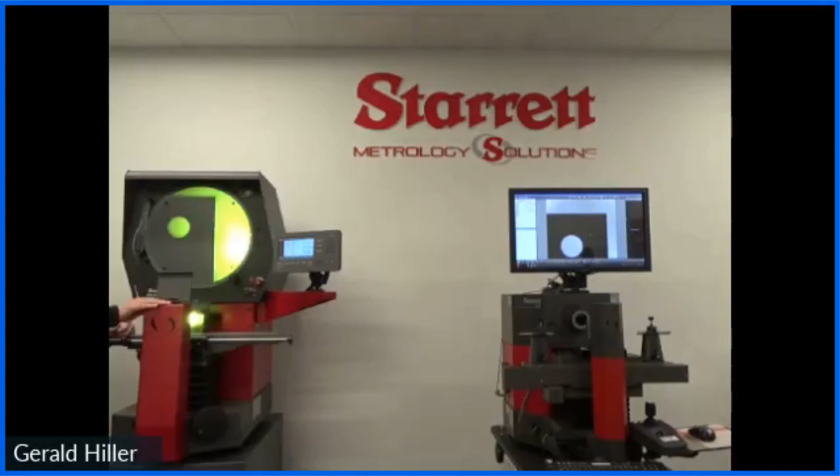On this particular model, we're using LED lighting. Other systems on the market you may find that are halogen. One of the benefits we see with LED is that you're talking tens of thousands of hours of life, whereas a halogen, you're looking at hundreds of hours.

So just to kind of go over the nuts and bolts of it, we basically have a projector going onto our part. The light that gets through is creating an edge on the screen, okay? So in this case, we have a hole, it's actually going through that. Anything on the part that is blind, if you will, you cannot see. So we have our light being projected onto the part.

That light is then going through the lens. That lens then projects it onto mirrors, which are back here. And then that goes onto our screen as a shadow. Some of you may have heard this referred to as a shadow graph.

Now, different comparators are going to have a different number of mirrors. This particular unit has 2. There are some that have 1. The main difference is that with 1 mirror, your image will actually be upside down in addition to being mirrored or backwards. This particular system has 2, so it's been corrected. So it is right side up. It is still backwards or mirrored though. So like I said, that tends to be the most common. And as you can see, we can on the screen see our edges.

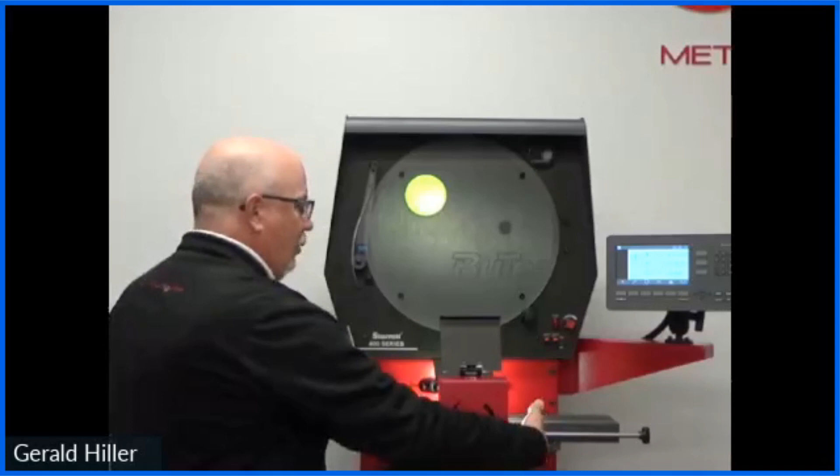So in this case, we're moving our X just by moving the knob. We do have a quick release option, so you can move the stage. Okay. We also have our zoom. Now, if you think about it, this is actually equivalent to our Z. We have a horizontal system here. This is actually our Z, which is our focus. And then even though it's going up and down, this is actually our Y.

Okay. The other thing is that we've got our protractor here. It may be difficult to see on the screen, the crosshairs here, but I'm actually moving this, and you can see my Q axis is moving. Now, these three axes, the X, Y, and Q, have encoders in them, and that counts how many steps, or as you move it, it's recording that distance up to, I believe, about a half a micron accuracy on those.

Excellent. And as far as CNC goes, I'm going to be showing a system on the video side with CNC, so you can see the differences and the benefits of that. Sure. So even though it's a standard system, the accuracies are there in order to be able to follow these blueprints and these tight tolerances, which is awesome.

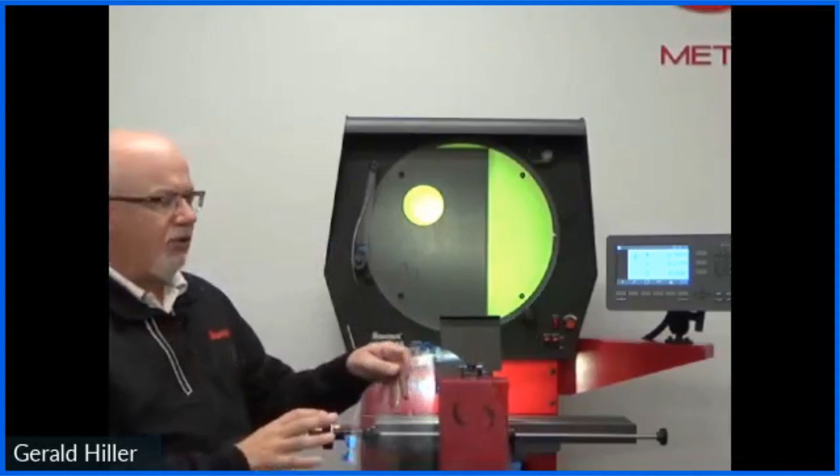So can you go into the most basic way to get a measurement on an optical comparator if somebody just wanted to take a visual check on it? Sure. So comparators have been around for 80 years or so, even more. The typical method for making measurements on this is with what's called an overlay. This is a Mylar overlay, and it may be difficult to actually see this, but there is an etched image on this. And these are all specific to the particular magnification of the lens that you have. In this case, this is a 10x.

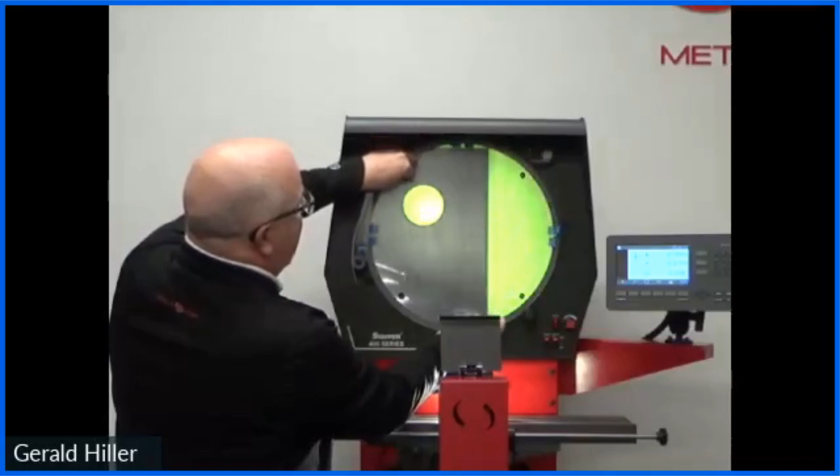It's got a grid on here, and you can put this on the screen. So instead of a horizontal and vertical grid here, you can use radiuses, you can use angles and so forth. But once you lay it on the screen, then you basically come in and adjust your image on the screen, and then you can find whether it falls into that particular overlay. So this is a go, no-go process, very visual.

You tend to find this with parts that maybe have wider tolerances, because there is some subjectivity of the user. Sure. So looking more at a pass-fail thing here, something that you could check really quickly, get in and out, get back to the manufacturing floor, and start making more parts, which is great. That's correct. Yep.

Excellent. So how do you track what the encoders are reading if you wanted to get an exact measurement on the diameter of that circle there? Sure. So, as I mentioned, these three axes have encoders on them, and they are actually tracking that distance. Now this over here, this is called a DRO, digital readout.

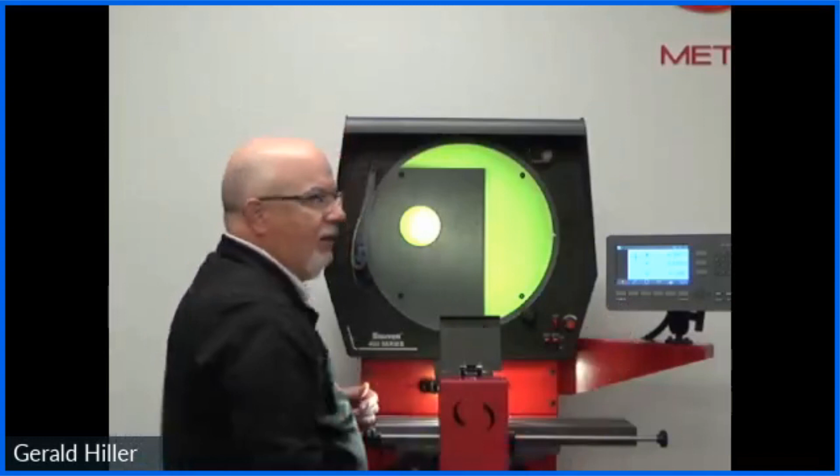We have 4 different options on this. The one I'm showing you today is called the MX200. It's made by a company called MetLogix. In addition to tracking positional accuracy, you can do geometric measurements. So for instance, circles, lines, and so forth. So in its basic form, we can measure a circle based on just a positional readout.

I'm going to turn off my surface lighting here, and I'm going to move this. And I know it may be hard to see, but we have a crosshair right in the middle of this screen. I'm going to visually put this crosshair down at the bottom of this circle. And then I'm going to go over to my DRO. I'm going to move this in Y. So I'm going to set my Y to 0.

Then I'm going to move this up to the top where my Y line crosses the top of the circle. And then I can see that we're looking at basically 0.343 of an inch. Now this can actually measure in inches and millimeters as well.

If I wanted to measure in X, I could come over here and get my crosshair on the edge there, set my X to 0. And instead of scrolling with my hand wheel, I can just release this and move it over here and then do a fine adjustment with my knob. And now we have 2.5 inch.

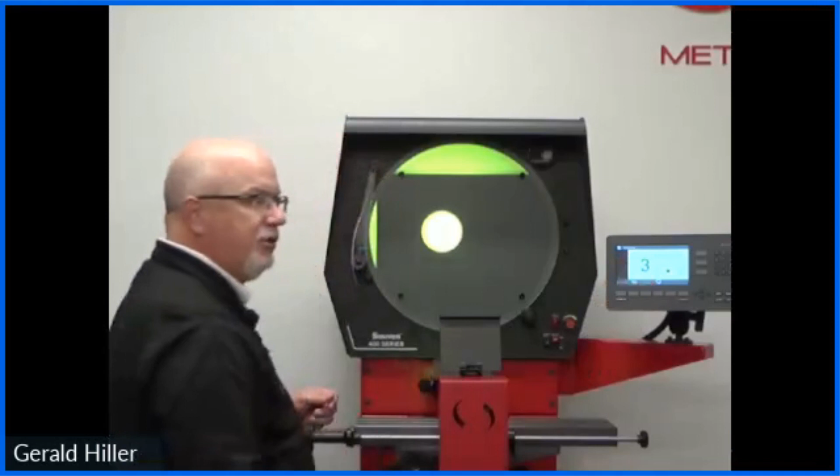And those that are familiar with this know the circle needs a minimum of 3 points. Done. And there we go. So this is a little more accurate than the way I originally measured it, because I captured 3 points. The more points you capture, it tends to be a little more accurate. Then you can measure form and other capabilities on here. So some of the other geometric capabilities are lines, points, and angles.

Now, I'm going to do one more thing here so I can show this to you. I'm going to measure another circle using the same method I did before. I'm just going to capture these 3 points. And now if you can see on my readout, I have 2 circles. When I have these 2 circles, I can do a distance between them.

I select distance, select circle 1, circle 2, my check mark, and this shows you the distance from the centers. I know it may be a little hard to see on the screen, but this is a change button. I can actually change this within the readout. So instead of centers, it actually gives me my nearest, and you'll see the length here. My L value changes as I do that. So that's to the nearest, and that's the furthest.

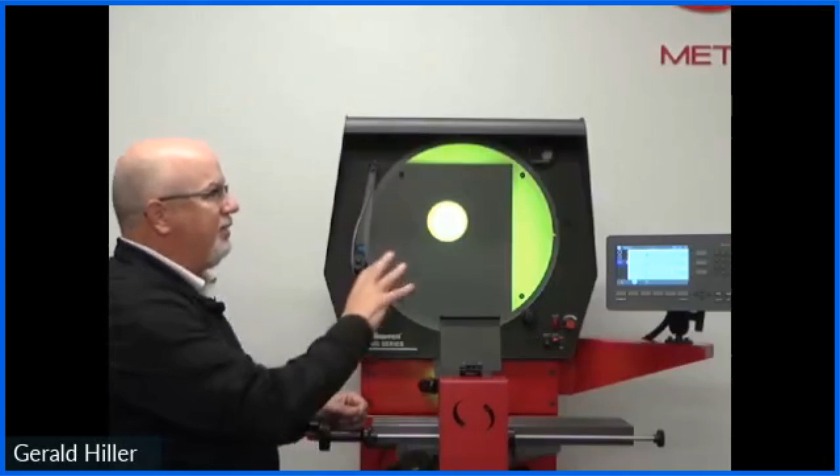So this particular readout has a number of capabilities in addition to geometric measurements. We can actually do constructions, midlines, points, intersections, things like that. It also has some GD&T capability, so true position, concentricity, and so forth.

Excellent. So I know my eyes aren't that great. So if I wanted to increase the accuracy and have the machine go and take some points for me, I see that little wand on the left side. Can you explain the optical edge detection for us really quick?

Yeah, absolutely. And I think your question brings up a great point, which is we're working off a crosshair here. So there's a lot of subjectivity inherent in it. Now, if my particular part, let's say, is an injection molded piece of plastic, there are wide tolerances there. So maybe in that particular case, it doesn't have to be exact. However, even my measurements can vary based on my eyes, depending on the day, the time of the day, and so forth. So I may not be that accurate.

Certainly in a room full of 4 people, you're going to get 4 different answers, and we may not be repeatable as well. In those particular instances, you may want to look at what's called the optical edge detection. And this is a fiber optic process, it actually has a sensor inside. So once you go from light to dark, it automatically captures that particular point. Now, I'll show you how this works.

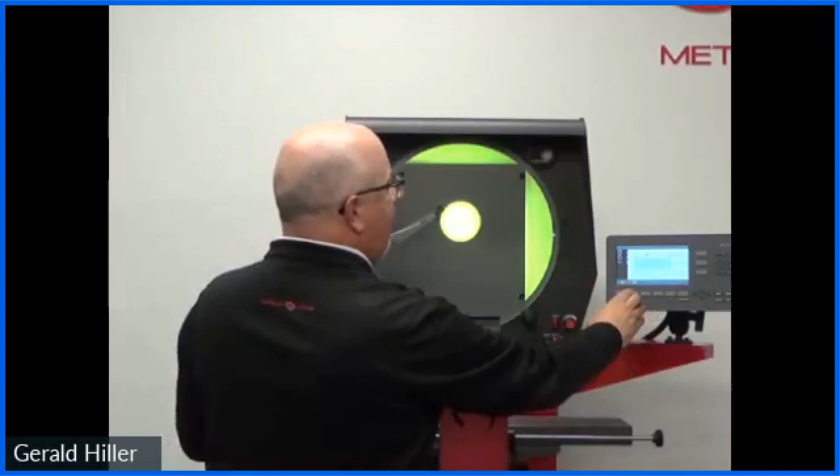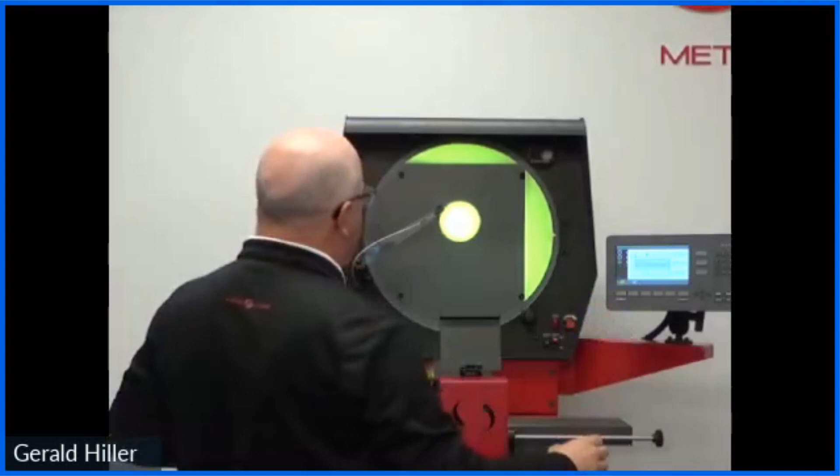We're going to change our sensor here, actually our probe, to go to an edge detection system. And it's real simple. We go through a calibration process that says, go to a lighted area, click next. So it knows where a lighted area is, because you can adjust the light on this. And you also have some different results depending on what material you're using. This says, now go to a dark area. So we move this sensor to a dark area. And then it says, go back to a light area. Done. So now we're actually using this edge detection device.

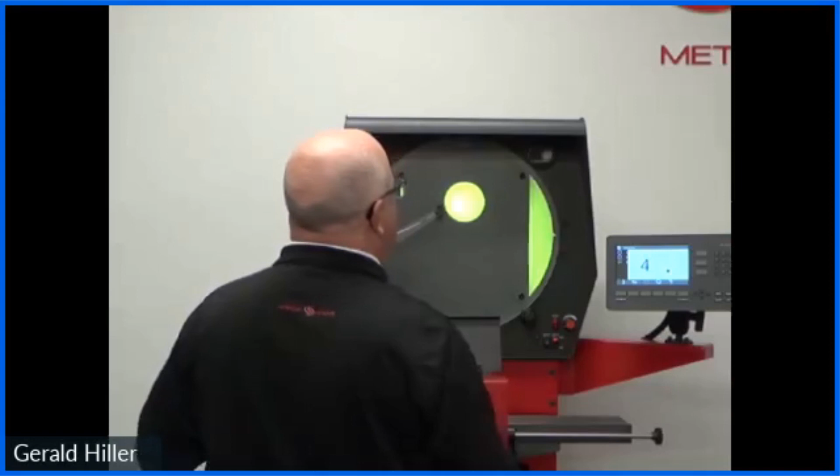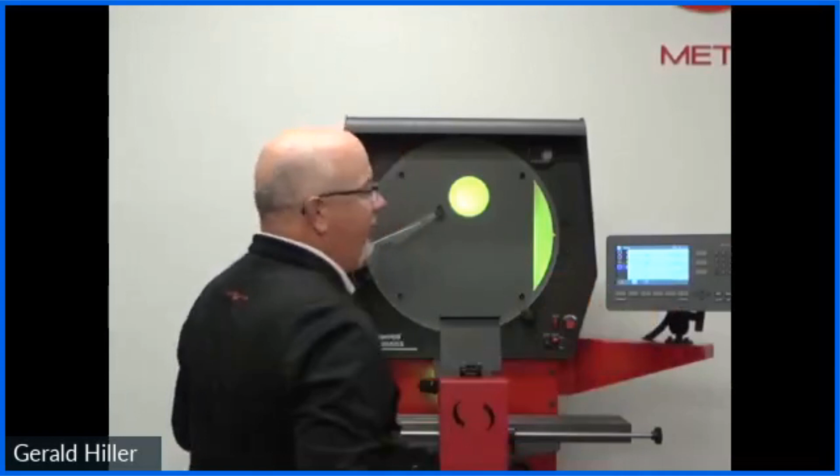So if I now want to go to measure a circle, as I move from my dark to my light, you're going to see that it actually captured that point automatically. And then I'll move down here. And you see, this is actually a very fast process. So in the same amount of time it took me to visually measure 3 points, I've captured 8 points. And this is probably the most accurate and repeatable way of doing this measurement. Like I said, this is an option on all of our systems. It's not something you have to have, but it is an option.

Absolutely. Just one other thing to add is the edge detection works very well on profile lighting, because you need a very clear contrast between light and dark. When you get onto surface lighting, edge detection doesn't work so well. So with your particular customers, if you're finding you're doing a lot of surface lighting measurements, maybe the edge detection isn't best for you. If you're doing a lot more profile lighting measurements, the edge detection is a nice solution. Yeah, I totally agree.

I mean, getting more accurate and repeatable readings, I think, is what everybody's goal is. You saw how fast you were able to take 8 points on that circle, in less time than you took the 3 points. Getting more accurate readings in a quicker amount of time is what every manufacturer wants. Right. I mean, it helps to handle that nightmare of shipping out bad parts or rejecting good parts. Correct. You have the comfort of knowing these are good parts or truly bad parts.

So. Absolutely. So here we are looking at this HB 400. What are some other standard optical comparator units that would be available? So we have an entry-level system called the HE, as in Edward, HE400. It has one mirror on here, as I mentioned, so upside down and backwards. It has a smaller stage. So as I go through these different models, they have different stage sizes or the maximum part you can measure. And we can certainly provide all that spec information afterwards for all your customers. So we have an entry-level system, HE. We have our HB. As I mentioned, all these come with the option of the edge detection.

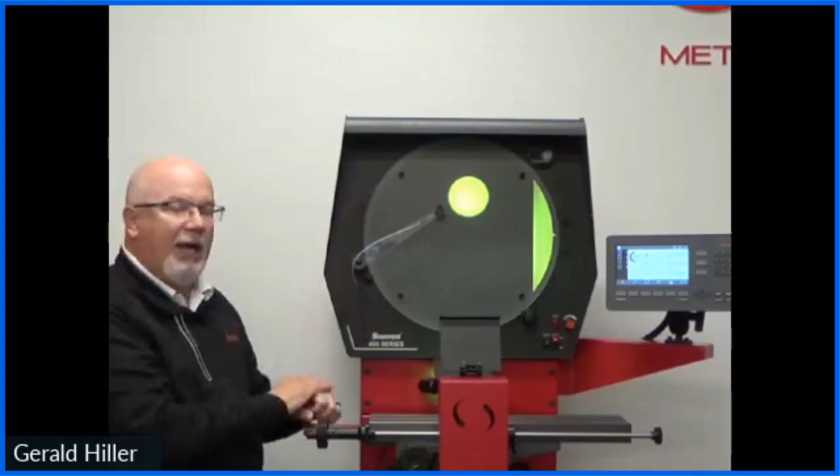We have the HD, as in David, which has the dual lens system. And we get into the larger floor models like the HF, as in Frank, 600, 750 that are actually really quite large. These, as you've seen, sit on a bench or cabinet. The larger systems are actually floor standing, so they don't sit on one. So you've got screens that are 24-inch or bigger, and then you have stage movement that is significantly bigger as well. This particular system has a horizontal orientation to it.

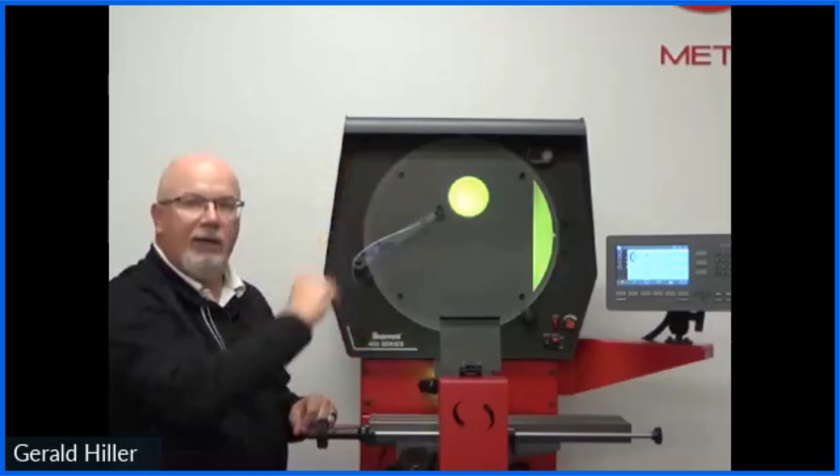So your optics are actually going horizontal to the part. And we also offer vertical comparators as well. So your part sits on a piece of glass, you have your profile lighting coming underneath, you have your lens on top, and then you have your shadow or your screen right here to see that as well. So really two different orientations.

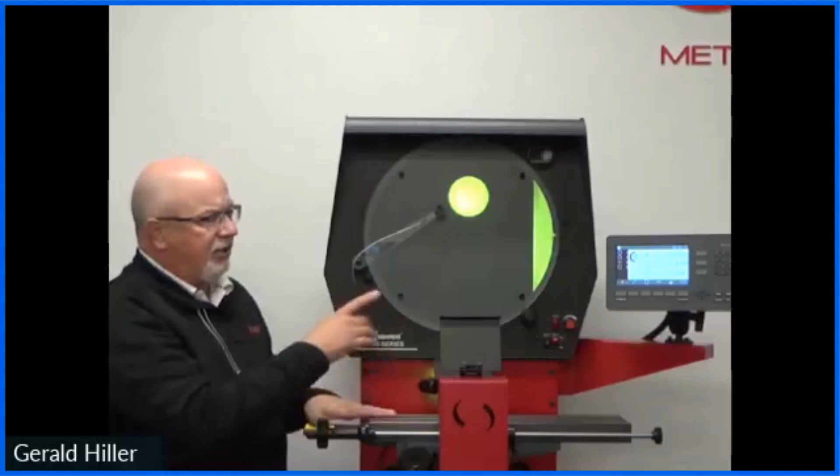Excellent. And then my biggest issue when it comes to optical comparators is how do you get your parts to sit flat on the machine? It gets to be very difficult to fixture them up there. What are some options that are available? So some of the options, and you'll see it on the HDV, we have vices, we have rotary vices. So one of the challenges you may have is a part may have a unique angle, so you want to adjust it or rotate it on a vice, so that particular feature is square to your optics.

We have centers. So if you have a turn part and you want to connect it with centers, you have that option as well, or V blocks. So you can just sit your turn part onto a V block and view it sideways as well.

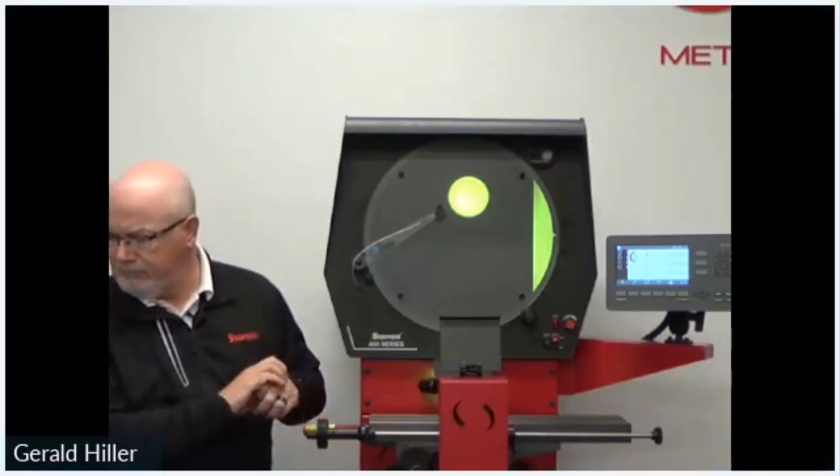Excellent. So we're about 25 minutes in. Does anybody have any questions as it comes to the standard optical comparators? Feel free to use that Q&A box over there on the left side. Otherwise, Jerry, if you got anything else that you want to add to the standard comparators, otherwise I think we're ready to move on to digital. Yeah, let's move on over to our HDV system. Sounds great.

So this is the HDV 400. This is our mid-range, if you will. We have two benchtop models. We have the HDV 300 and the HDV 400. Main primary difference is size. We also do have a floor standing model called an HDV 500. So let me just kind of go through the same format, if you don't mind, of what I did here as far as light sources.

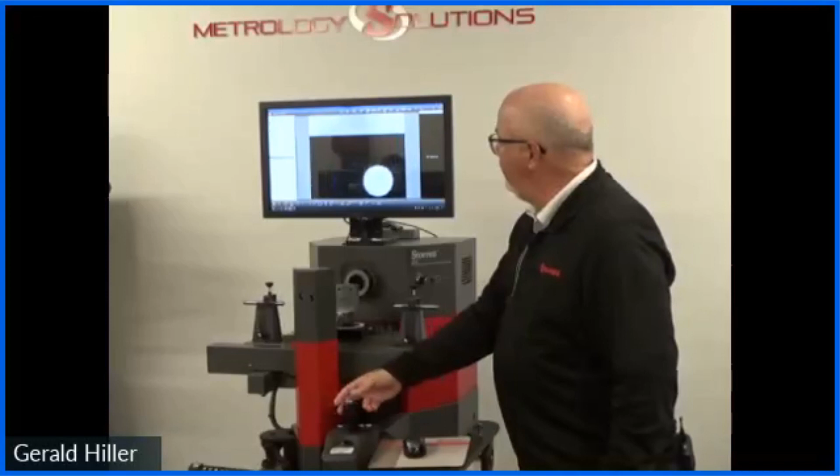Yes, please. Yeah, so very similar to the optical comparators, we have our backlight here, and this is LED lighting as well. This projects the light onto the part, goes through the lens, but instead of going onto mirrors, you see there are no mirrors back here. It's actually a camera sensor behind the lens that's capturing this image. It's going through the software and projecting it onto our monitor. Okay. So as I move this, you're seeing a live image of this particular part.

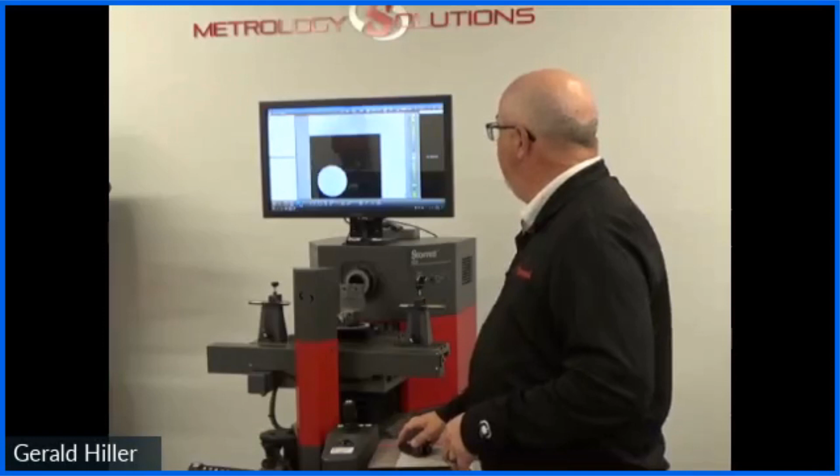Now, where a video system starts to strongly differentiate itself from optical is the surface lighting. If you remember on the optical comparator, we had fiber optics that came out. You could see this surface fairly well in comparison to maybe some competing models. But when I turn on my surface lighting here, you see a significant difference, and I'll bring this into light. You can actually read the surface. And the primary difference is because it's actually going right to, like I said, a camera sensor.

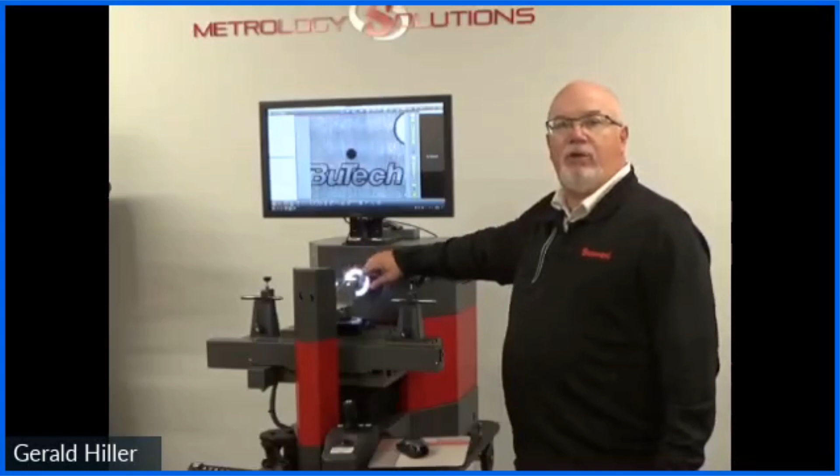Now, the surface lighting on this is a little different. We're using an LED ring light. And this can detach very easily. We could put it for different lenses and so forth. Excellent. That's one of the biggest differences to me as I'm showing these different machines to customers is the surface lighting on the digital machine compared to a standard optical comparator. I mean, you can see the optics is crystal clear, and the customers always seem to love that.

Yeah, and if you look really close here, you can see we've got a bevel, a little fillet here. And many times you want to measure that, and that's completely blind in an optical comparator. A lot of turn parts, you want to check the end. Those aren't through features or through holes. So that's really where this starts to have a tremendous benefit over an optical system.

Sure. And how does ambient light affect the digital comparators? Quite honestly, unless you have a floodlight sitting in front of the part, the sensor pretty much ignores ambient light. We have a number of customers that have these on the shop floor. They are fairly well protected from dirt and moisture and so forth. If you find that you're in an environment where it is rather dirty, we can do a positive air system. But really, ambient lighting in general does not affect this more or less at all. Awesome. So what kind of magnifications are available on the digital unit?

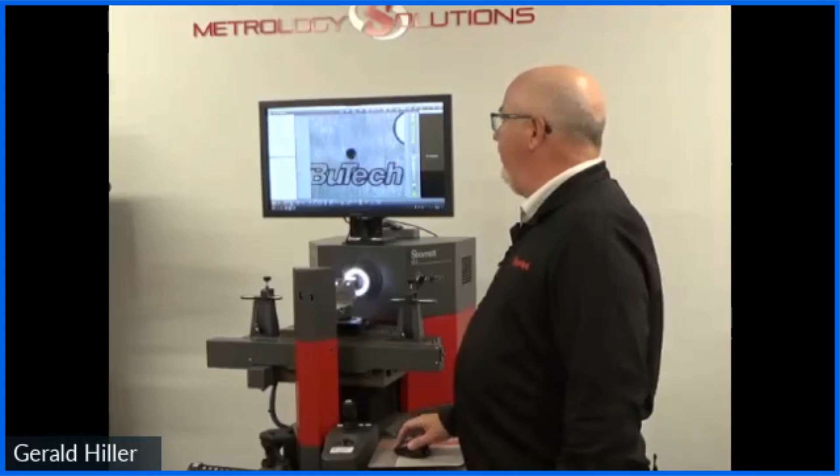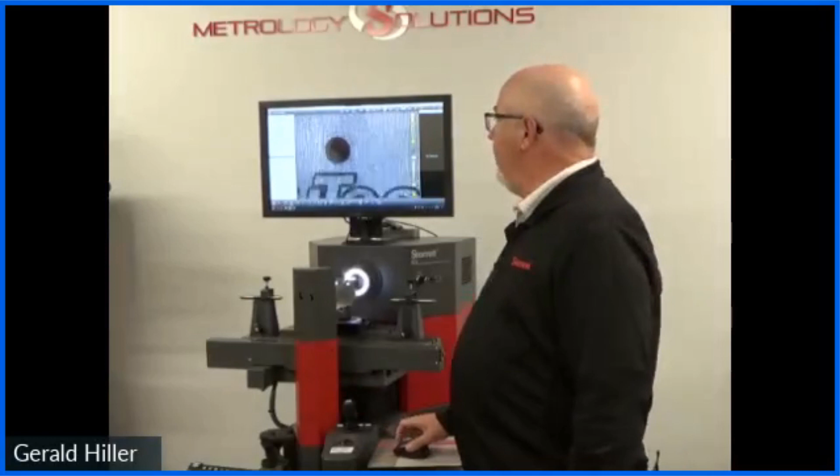And just one other thing to point out: in addition to the magnifications, because this is video, we can actually do a video zoom. I'm just using my scroll mouse, so I can go in and check to make sure that my focus is good there. And that's something you can't do on an optical. Yeah, that's amazing. Basically like taking a picture on your phone and zooming in a little bit, giving you a little extra field of view.

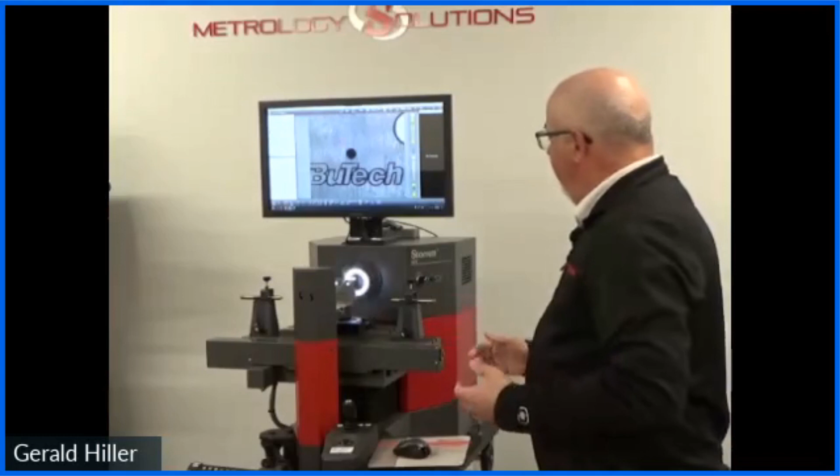Correct. So I'm noticing that there are no bars or handles to move this machine. So how does the CNC machine work here? Yeah, so this particular system is a CNC movement system. Right here, you'll see that we actually have a joystick. For those of you that may have a CMM with a CNC, it's a very similar process. We have our X, we have our Y, and then we have our Z, which is turning the knob itself to move the Z.

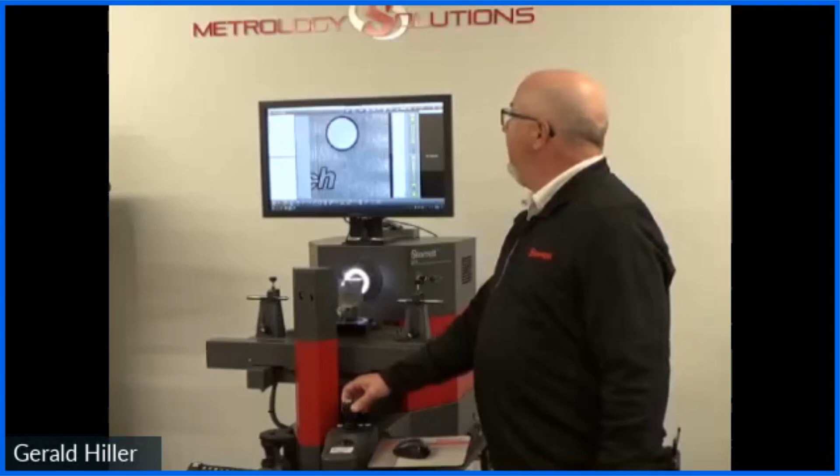And as I mentioned before, our Z in a horizontal case is actually front and back, whereas on a CMM, your Y is front and back. So there are some benefits. I'm going to run a program for you in a minute. With a CNC, as long as you've set up your alignment process, you can actually run a part and inspect it unattended. Now, that CNC is an option for this. We could also use the entry-level system, which does have the knobs for movement.

Now, one of the things you don't see on here is the knob for the protractor, as you saw on an optical comparator. We don't need that within the software. We can automatically correct for any type of skew, if you will. And there is a benefit to that, because I'm going to be showing you how we use overlays.

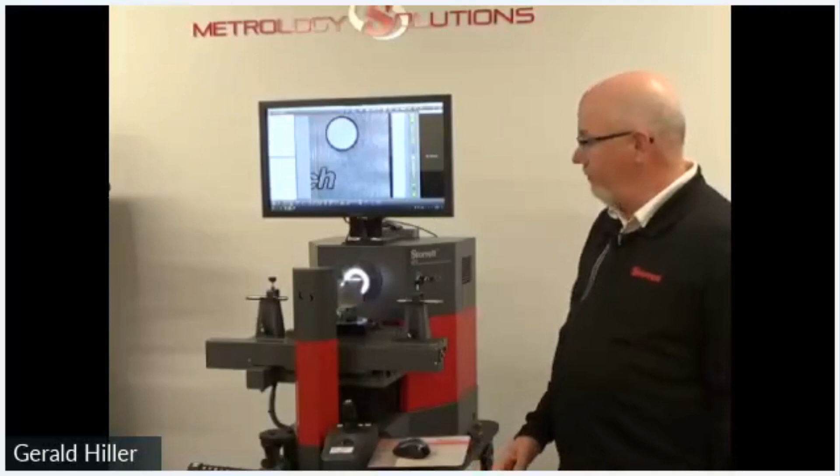Sure. So we're here looking at basically a monitor. There are no buttons on it, there's a separate readout. So how are you going about taking measurements on this system? There are a couple of ways we can do that. We have a number of different probes, and if your users really like the crosshair, you can use a crosshair as you did before.

If you look up in the upper left, as I move this, it's moving my positional information as well. Something that is unique is I can actually grab my crosshairs and move them, and as I move them, you'll see my position changes. So this gives you dual functionality on your crosshairs. Now, what I and customers typically like to use is called iMeasure. We can do this on the screen; the screen is actually a touch screen.

So I'll just touch the edge here, and it measured that edge automatically. The software is always looking for that contrast between light and dark. So it captured that line. I'm going to go into my part view, and you'll see this line. In one touch, it captured 92 points. You can imagine capturing 92 points with your crosshair on an optical comparator could take quite a bit of time. Now, I could also measure a circle, and this is just clicking and dragging my mouse.

So I can set the beginning and the end. This is nice because, let's say if you have a keyway on a circle, we can set the beginning and end of that measurement and completely ignore that keyway.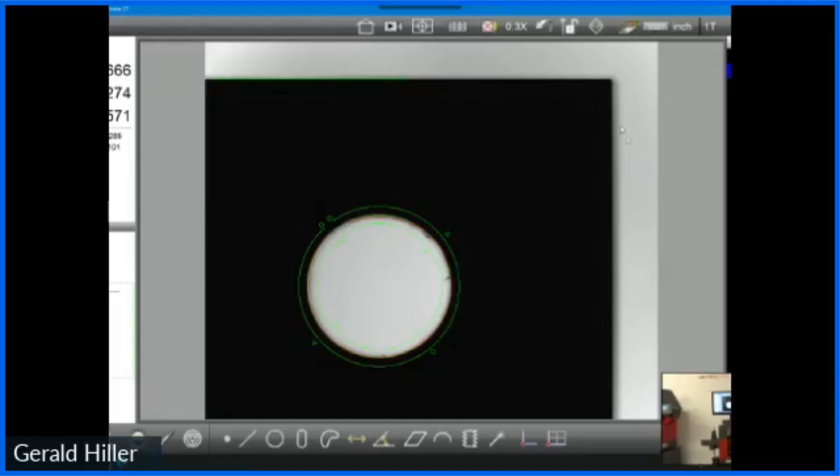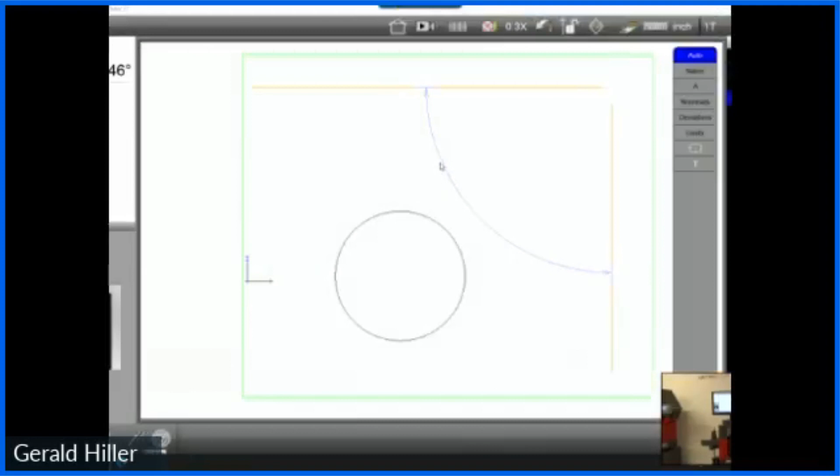And I'm going to measure the line here and go to what's called my part view, because in this case, what I can do now is measure things like my angle. What's my angle between these two lines? And this shows us our results in the upper left there. We can come up and mark this a little bit if we want. We can say, there's our angle. We want to check our diameter and so forth.

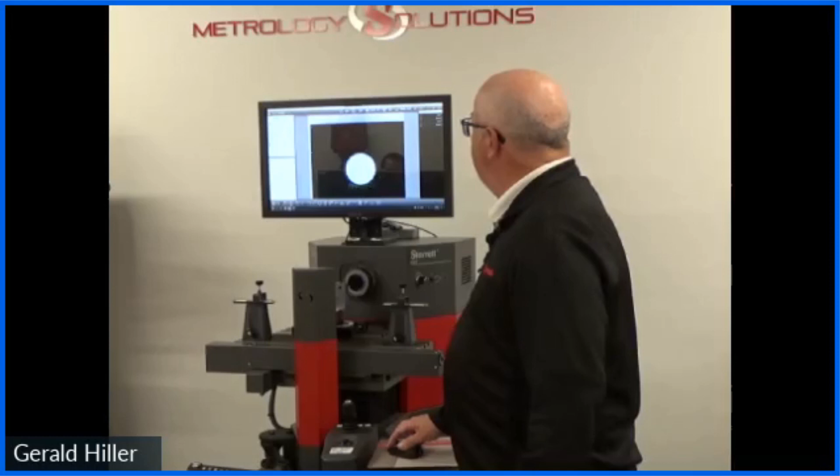And I'm going to go over and measure the same thing I did on the optical comparator. I'm going to measure this second circle, and I'm going to measure that distance as I did before, and you'll have a better view of measuring those distances here and changing from centers. There's our centers. And then what we do is we choose our change button. That's the nearest, and that's the furthest. Okay. Excellent.

So what kind of differences are there from the digital comparators as it comes to the standard optical comparators? What are you going to gain by upgrading to a digital side rather than an optical side? Well, one of the nice things on the digital side is, as I mentioned, we don't use standard Mylar overlays. We actually use 2D CAD files for that.

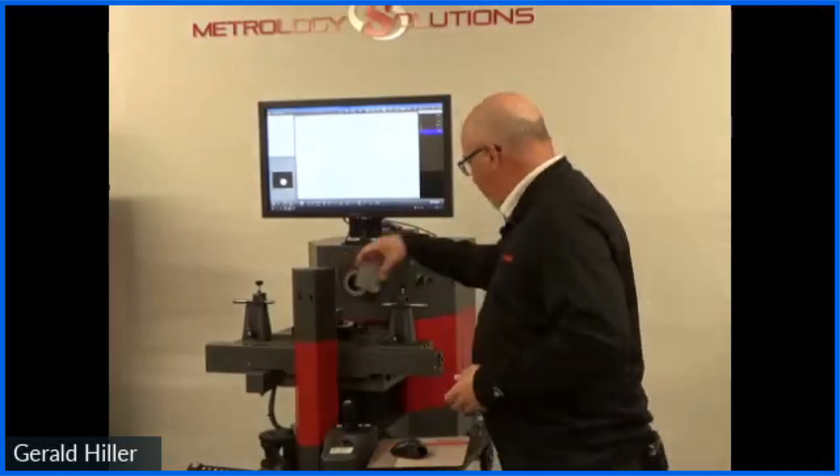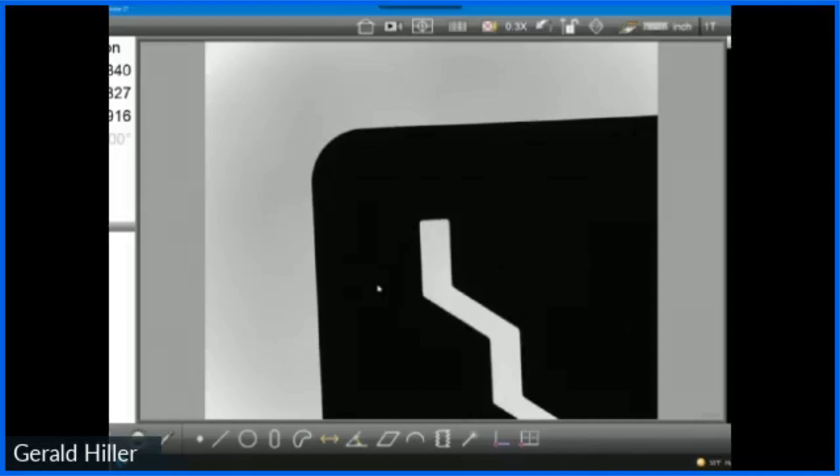So I'm going to put a different part on here. This is a standard demo part that we use. And I'm going to fixture it on our rotary vise. I'm going to create a new program, and get that into view here. Now, this is just a standard DXF file from SolidWorks. It has its own alignment system, which happens to be my 00s up there.

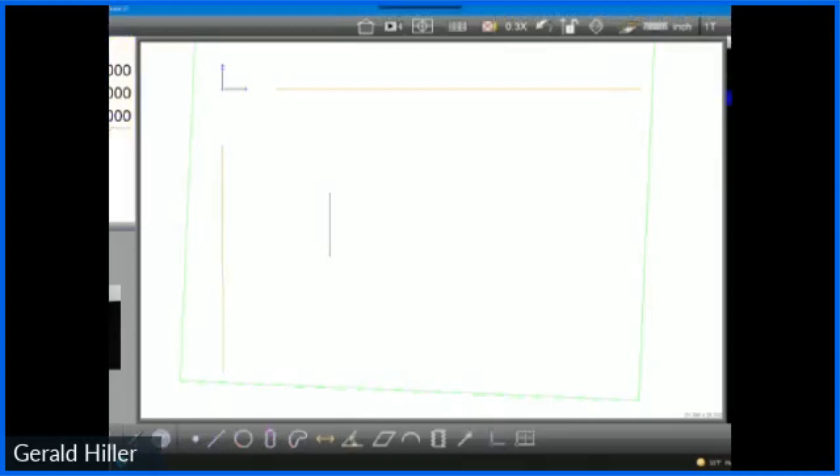So I'm going to bring in this CAD file, but I need an alignment reference before I do that. So let me undo that. I'm going to do a skew, because you can see my part is crooked there on the screen. Done. And then I'm going to make a line here, and I'm going to set my 00 up at the top. So that's my datum. So now this particular part is aligned to the same alignment structure that my CAD file had.

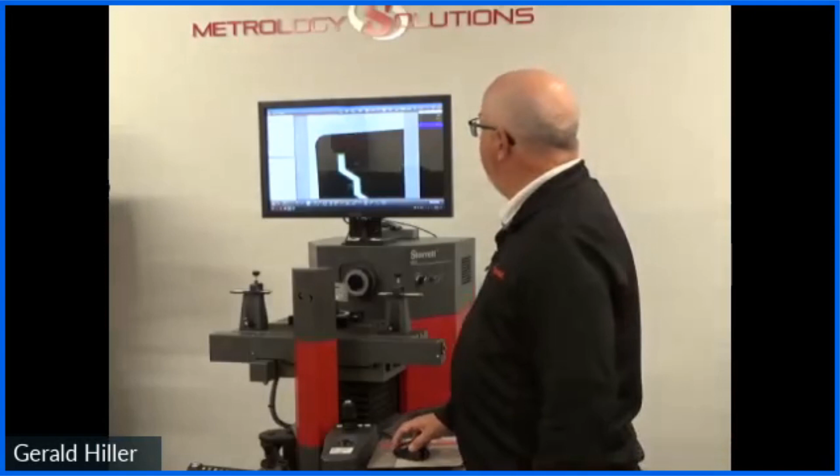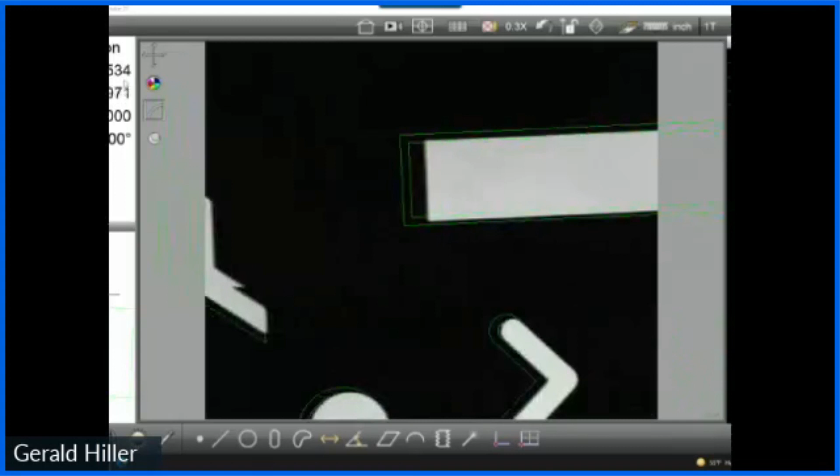Once I have that, I can go back to my live screen and choose a different probe. This is my overlay, or digital overlay, digital comparator, I think it's referred to. And once I do that, I just do a long press. I bring in the overlay, or the CAD file, which I've already adjusted for 10 thousandths tolerance. And as I move this on the screen, these green lines represent that 10 thousandths tolerance plus or minus. And as I move it, the CAD file stays with the part, so you can visually see whether this is in or out.

Now, this CAD file is completely independent of what magnification lens you have on the screen. So if I were to switch this to, let's say, a 20x equivalent, it would automatically scale to that size. So no more need for physical Mylar overlays, no more validating them every year. That's done with. Your CAD files are theoretically perfect and they don't change over time.

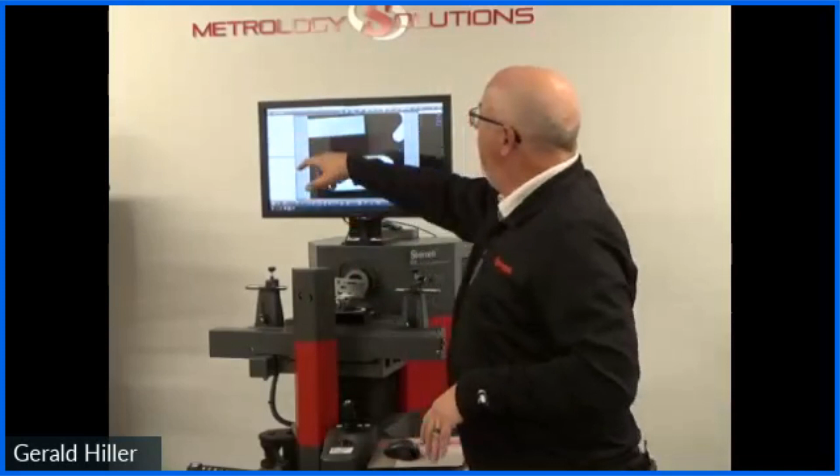Now, the other nice thing about the CAD file we have here is that we could actually program from that. So let's say you have a more complex part, and instead of manually programming it, we could bring in that CAD file, do the same alignment we did here, but program off those features. The main benefits of that are speed, but also you're bringing in that nominal information from your CAD file, so we don't have to go in and enter that into our window here. So let me just select something.

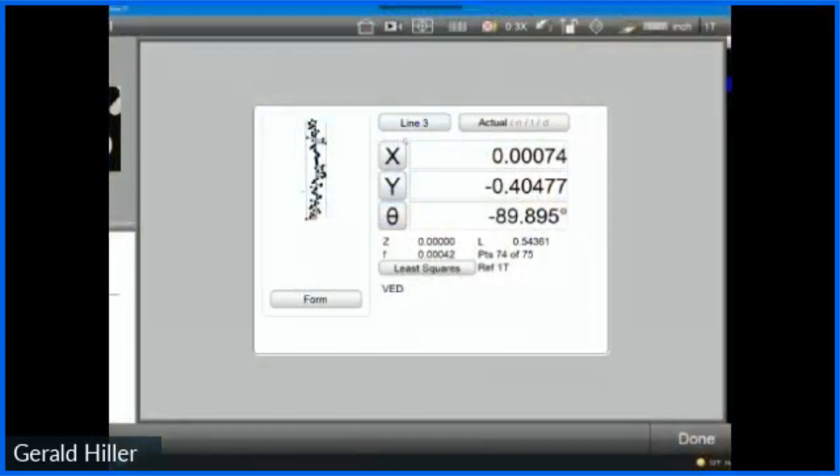So as I mentioned, this is actually what we call our feature detail window. This shows our nominals, and then we can set our tolerances, and this shows our results.

So I talked about overlays and using CAD files. The other primary difference you're going to find with a video system is a nice option we have in the software, and that's called our thread module. I'm going to go ahead and put this on the screen here. Create a new program.

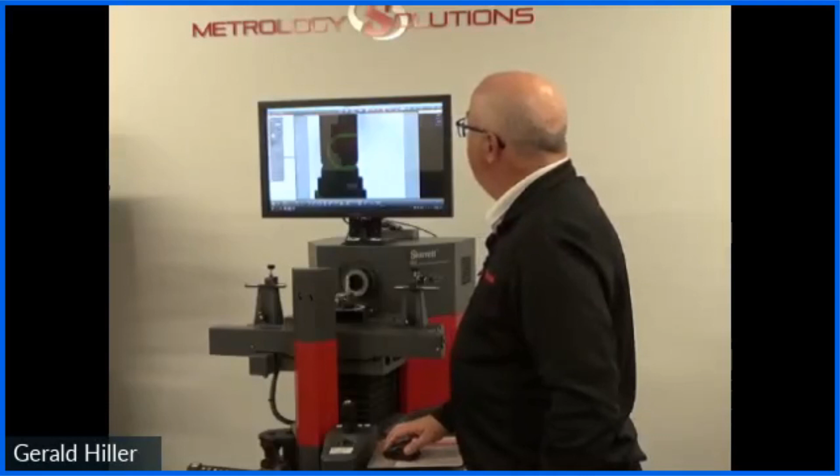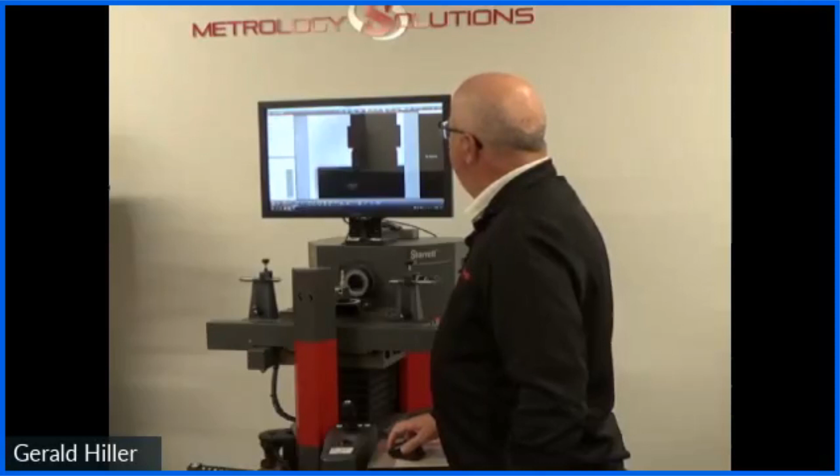And you'll see my threads there. Because this is video based, I can just choose my thread module. I can highlight those particular threads. Enter, done. And it's actually measured those. This is my major, this is my minor, this is my pitch diameter.

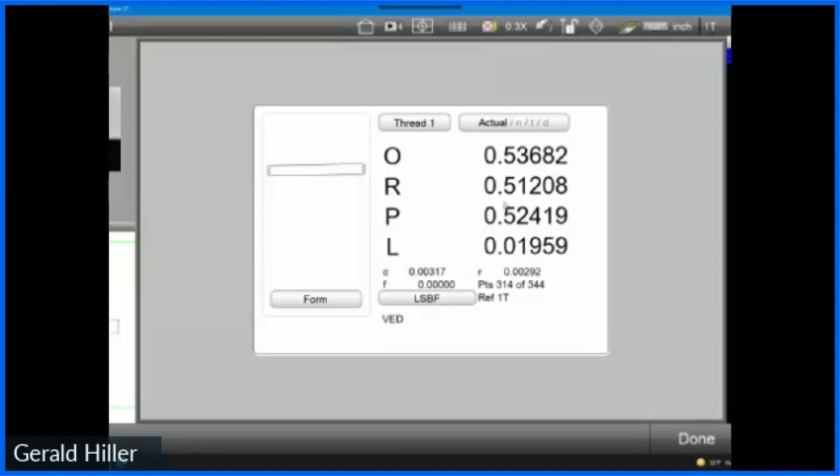And then we go over here. This tells us this is 9/16. We've got a pitch of 24. And if we want, we can choose the particular class. So usually when I do demos like this in front of a crowd, this is where I get the oohs and the ahs, because everyone who's used a comparator in the past has tried maybe a 3-wire method or maybe an overlay to check those. This is done very quickly.

The other nice thing about this is that I can then show that on a report showing the results of those particular features and present it to the customer. That's one thing that I've noticed in this particular software is the reporting and being able to export your statistical analysis that's automatically built into the software. A lot of people really seem to like that if they're running a lot of the same part, that the statistics are built right in.

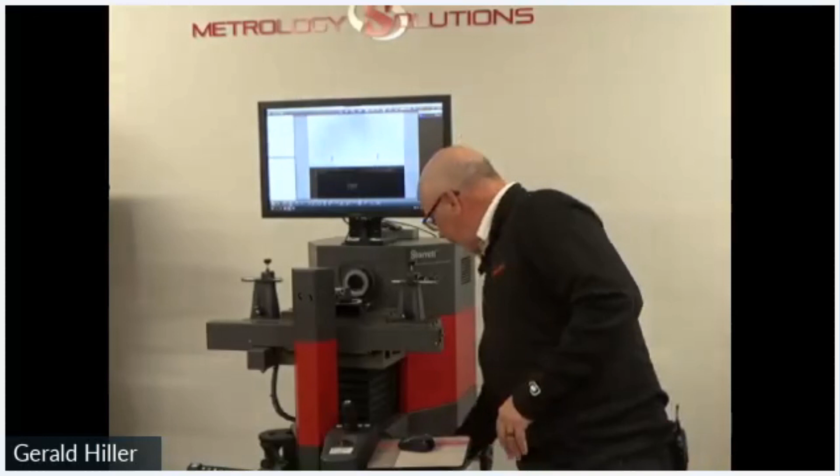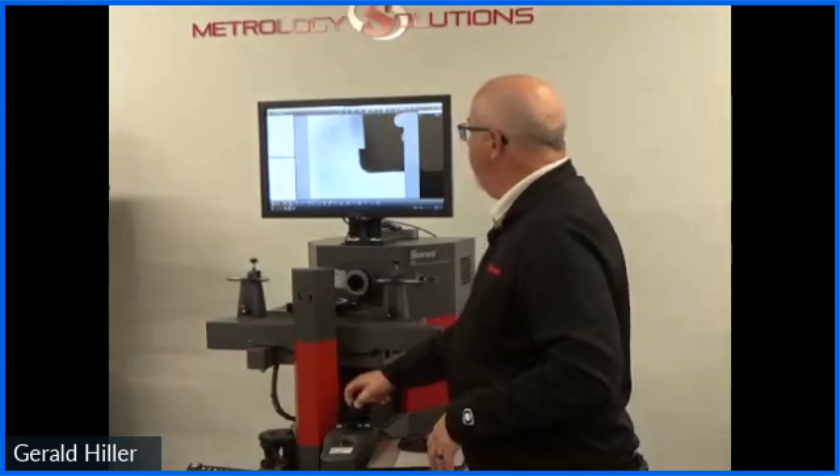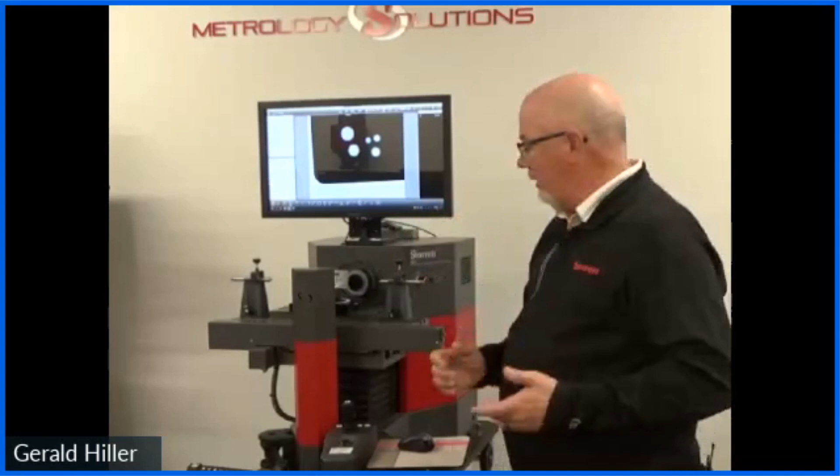And one of the last things I want to show here is I had mentioned on the comparator the CNC capability and some of the benefits. I'm going to run a program that I've already pre-programmed. And I'm going to use a feature called pattern recognition. And this is actually a very powerful function in that, as you saw when I brought in the overlay, I had to set my alignment process manually. So with the program that's been set up, it just needs to find a particular pattern, or a pre-alignment, if you will. And then it will automatically do the alignment and then measure the part.

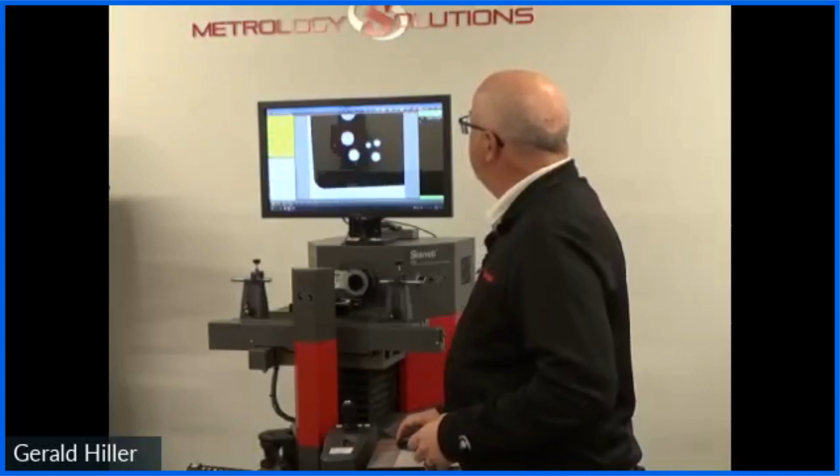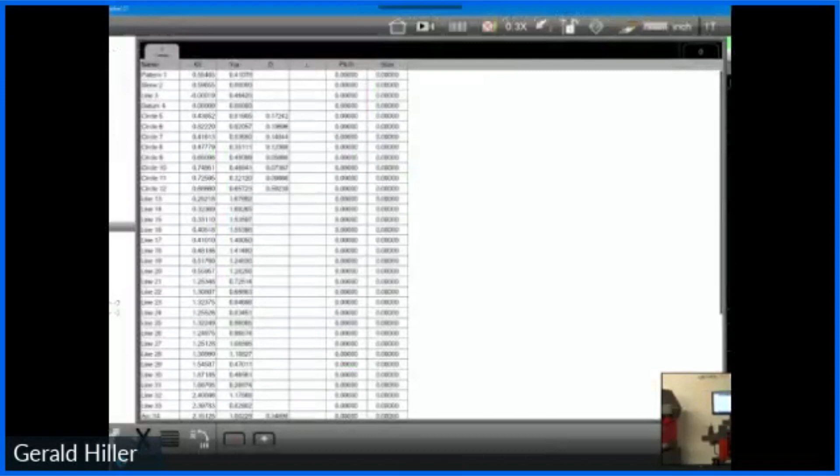So I'm going to just press play. Let me create a new program here. I'm going to press play. Let me bring up this. This one is a slide program. And I'm just going to press play. First thing it's doing is just asking to make sure that I get this pattern into my field of view. Once I click that, it's going to proceed. It's doing my alignment now. And once it's got that alignment, it's doing the measurements, moving the part, it's doing everything automatically.

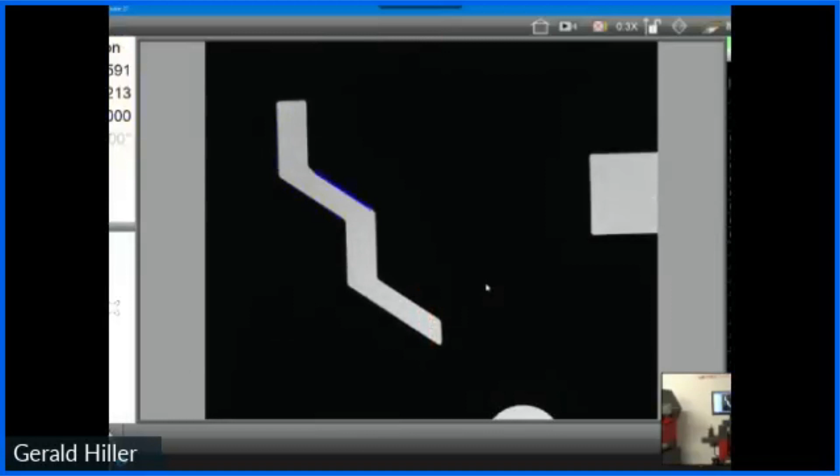So if you've got a busy shop, you've got a number of parts you need to inspect, this really saves a lot of time. And we can set this up in a fixturing process. So it's just a matter of putting the parts into place. We can do multiples across the stage. And then when you're done, this is our results. So a number of benefits you can get out of CNC.

Excellent. Jerry, I did have one question that just popped up, asking if every thread module is included with every system, and how would they know if their system has the thread module? Sure, it is an option within the software. Not all shops need thread modules. So if it's something you need, you can request that at the time of your order of the system, or at a later date, if you find that you're doing a lot of threads, you can just contact us, and then it's just a different software license. We could do that over the phone or over the web.

Sure. So if they need the thread module and they don't see it on their homepage, they'd just be able to reach out to you guys and get that thread module license. That's correct. Yep. Excellent. Okay. I think we're pretty much wrapping up with the digital side. So do you want to go through some of the similarities between the optical comparators and the digital? Sure.

So really what I've shown you here is the similarities. The primary similarity is just the orientation. I have the benefit of visiting a number of different shops on a weekly basis, certainly more pre-COVID than today. But this horizontal orientation is what you find most job shops are using. Some vertical orientations you find in medical device companies, but primarily this. So you see this, you see the same stage.